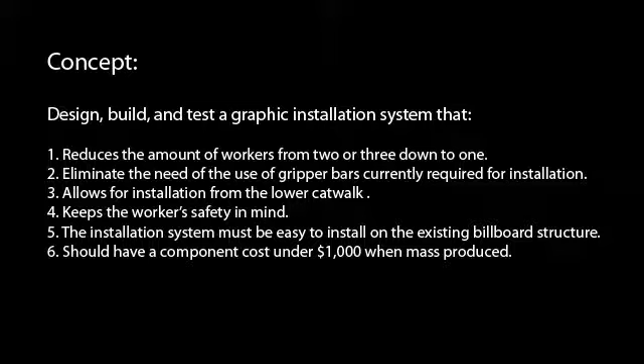Alright, we're going up on a billboard. This one's really high in the air, as you can see. So we're ready. Safety first. Safety first. You got this tie-off leg.

I guess I'll go with them. Yeah.

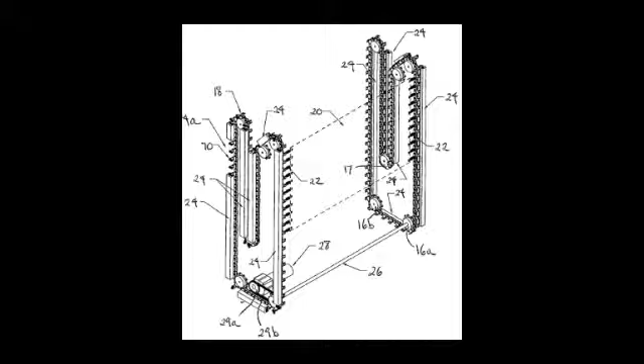Hey guys, we're from Metco today. We just stopped back by. This is our second visit. We came with our initial idea and we got some supplies from them. So we went up on a billboard today, took some good pictures. We've got a better idea of what we're doing exactly.

We got some materials, some vinyl samples and some cable and stuff like that from them. They're also going to make us a frame that we're going to be able to work with. And we talked to them about our design. They like it. They had a couple of ideas for us and we're going to work with those and come up with a prototype.

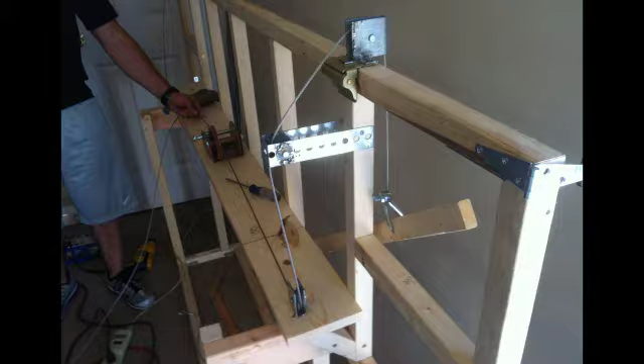Dan, you weren't really wrong. Now you are. Go ahead.

Okay, so today we have installed the vinyl lifting system, which basically will consist of these bars right here, which the clips will be attached to, and one on the other side as well. And the vinyl bar right here, which will actually attach to the front of the vinyl, at which point this winch will crank and it will lift using a series of 3 pulleys here.

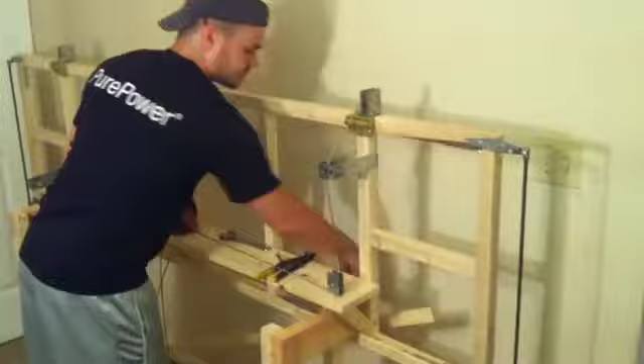And we only have one side currently, but we're actually working on the other side. And we'll raise the vinyl completely up into an upright position, and at a certain point it will actually flip this, rotating the spring hinge right here completely back, allowing the tension on the vinyl.

We are in the Metco lobby. You can show our model. You can drop the bottom now. You can wait a little bit and drop it later. We're going to drop it now because we need a little extra weight on this. Yeah, there's not enough weight to pull it down.

If you're going to use an aluminum extrusion, you can shape the aluminum extrusion so it's sort of rounded and it'll slide right over. Yeah, again, that's just a problem with this model, but it's right here what we're talking about. And once you get it out to clear the billboard, you're fine. Now these are the hinges that we're talking about, the spring-loaded ones. There we go. They drop back down into place just like they're supposed to.

And this is what I was trying to talk about with you just a second ago. So if those pulleys were right there, we'd just be running cable directly on that frame, right? I don't know if that's an issue because it's a metal frame. It may not be an issue. We can always have a little sleeve right there because it's going to be behind it anyway. Yeah, but that was really the reason for this forward pulley, to keep contact off of that.

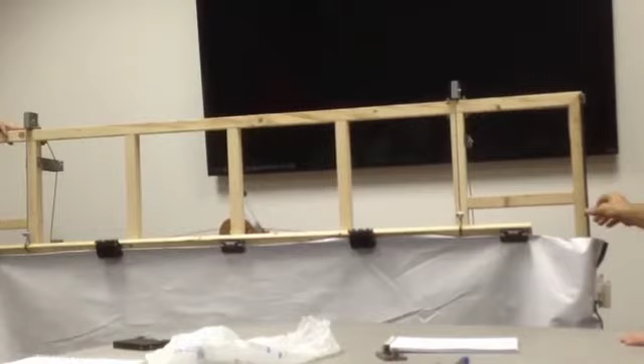Gripper bars, first of all, but let's face it, any other design outside of gripper bars is tough. Yeah, it was a hard one to eliminate. We wanted to do it on everything. I was like, you gotta have a solid frame somewhere. You just do. So this piece here, does that have to be a rod, or could that be cable? Yes, actually, cable is definitely an option.

The problem that we saw with the cable is unless it's really tensioned, once you lock it back, the middle sags. Yeah, because then you're gonna need an awful strong tension. We decided we could do multiple hooks. It's flexible, a one inch grip bar. Yeah, but one inch? And that's why we went with the solid rod, because it'll hold the shape better. We could get a heavier one. It won't be that much more.

Yep. And again, this is the winch that we've got. We've got it set up running both pulleys, which I think makes sense. That way you can keep solid tension. Some sort of adjustability in here would be good. Maybe when it's up and finally done, you've got an extra little leveling for tension you can throw on there if you had to get it perfect. But again, if these clips are set square and you've got that line, that line should be pretty set, right?

Now, what we're talking about, if this wasn't a spring-loaded hinge, we can actually take the spring out right now. That one's gonna be easier to pop out. Let's take this one out. We gotta not lose that one on the table. Anyway, once we're coming up, after we hit that hinge and lock over, if we're just pulling it down, I don't see what's gonna make that come the rest of the way over. Now, we can lock on the line to do that, but then it's gonna interfere.

There may be another way to get around that, but that's why we went spring loaded, because we needed something to make that flip back over, and we couldn't figure out how to make that happen. And this honestly seemed like a really good solution. The little springs did the job perfect as far as I'm concerned. That's what we're looking at.

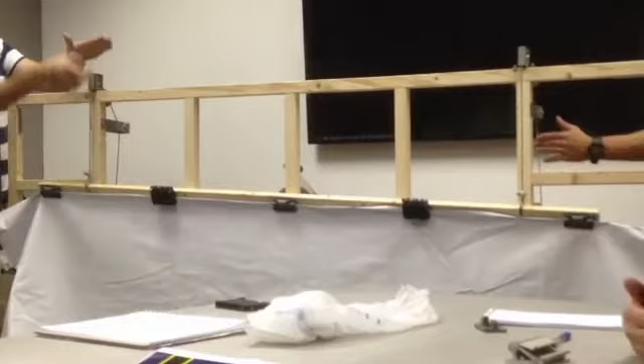On a larger scale model, this pulley could be a lot further down, give us a lot more clearance. It could also be out a lot further. Right now we've kind of constricted right into the main winch. If this was up a little higher, it could be out if we needed to, but up is the main key. And this is narrower, so when that locks up and folds over, you should clear this billboard plenty. We couldn't go that far back because the pulley's right here. It's such a short distance that it kind of disables that pulley from its job.

Plus, these are obviously not the final product materials. That's easy to use, and we've got a woodworking shop at school we can mess with. But see how that easily can become an issue with the levelness there because of this single spool. Also in our setup, holding the cables in place, we've got big bolts in here that are interfering with the cables going around. A better winch with maybe a divider, where there's a set for each side, would definitely work better. We just didn't have access to one at the time.

That's kind of what we're messing with. Anything you guys want to play with?